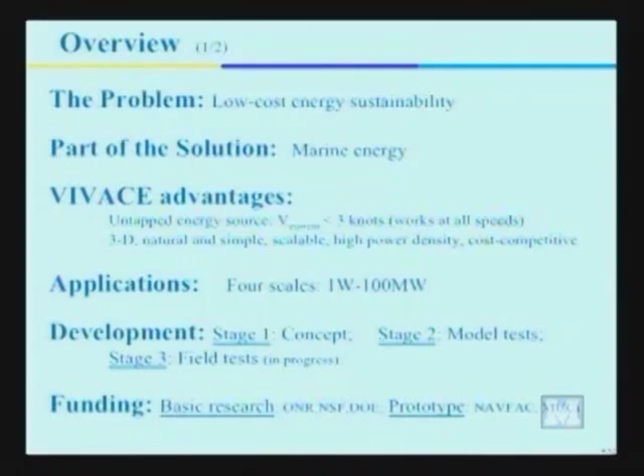The challenge we face when we harness hydrokinetic energy is that currents are typically slower than 3 knots, and rivers are typically slower than 2 knots. But turbines need an average of 5 to 7 knots to be financially viable. Of course, there are exceptions, like the British Channel current, which goes up to 15 knots.

Southwest of Korea, the current is up to 12 knots. The East River in New York, which is not actually a river, has speeds going up to 8 knots. And there are a total of 7 sites in the United States where velocities are in the range of 5 to 7 knots and higher.

So with this technology, I believe we are opening up accessibility to a vast amount of energy which right now is not accessible. And there are lots of applications of this technology that we will talk about.

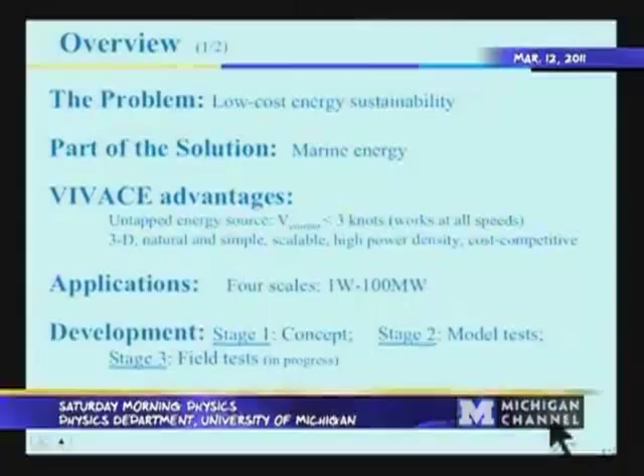Funding for basic research in my lab comes from the Office of Naval Research, the National Science Foundation, the Department of Energy, and for prototype development, it comes from the Naval Facility in Port Hueneme, California, and the Michigan University Commercialization Initiative, and other sources. This is where we are today.

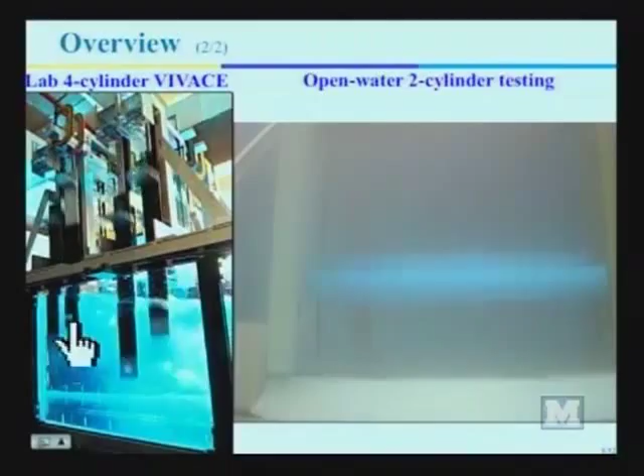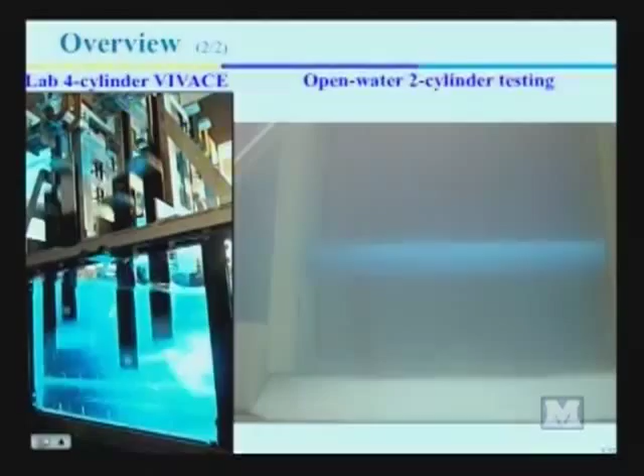Each one of these cylinders, or VIVACE converter, is a very simple machine, just a cylinder transverse to a flow, and the steady flow drives the cylinders transversely. So it behaves like a 4-cylinder reciprocating engine where the fluid flow is the fuel, but at the same time it's the camshaft and all the mechanical connectors. There's no mechanical connector there. Everything is hydrodynamically connected.

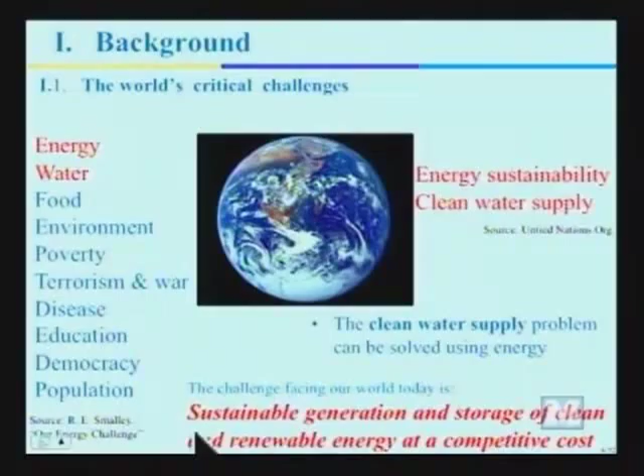Let me start by giving a quick background. There have been many studies of the challenges that the world faces, and energy always tops the list. Water comes second. But if we can actually solve the first problem, then we can do something about the second one. The issue is that we need a lot of energy in order to desalinate water. So I would say the top challenge we face is sustainable generation and storage of clean and renewable energy at a competitive cost.

How much renewable energy do we have? To put into perspective, this is how much we typically consume in a year, about less than half a zettajoule. Joule is a very small number, but zetta is 10 to the 21. Biomass captures about 4 to 5 times as much, winds can supply about 12 times as much, and oceans absorb about 600 times as much energy. So marine energy is about 97% of the energy we get from the sun, after reflection and radiation from the atmosphere and the surface of the Earth.

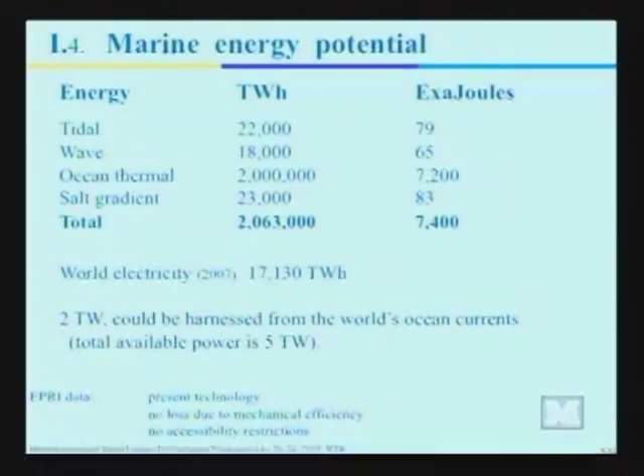But where is that energy? Unfortunately, most of it is in ocean thermal energy, and there are devices that can harness ocean thermal energy, but they are big and expensive and not particularly scalable. On the other hand, we have plenty of energy in waves, tidal, and salinity gradient. Compare this to world electricity consumption, which is about 17,000 terawatt hours. The Electric Power Research Institute in California has done several studies, and these numbers represent what we can harness with present technology. Hopefully, with new technology coming up every year, we will be able to access more of that energy.

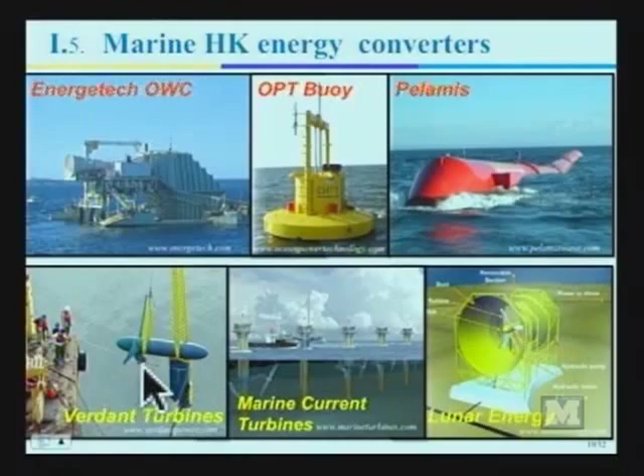And these are underwater devices. They're all turbines, as you can see. This is the Verdant turbines, I'm sure you've heard of those, about 5 meters in diameter. This is American, this is British. Each one of those monopoles has 2 propellers, each one is 12 meters in diameter. They're pretty big, so we're talking about 40 feet in diameter propellers.

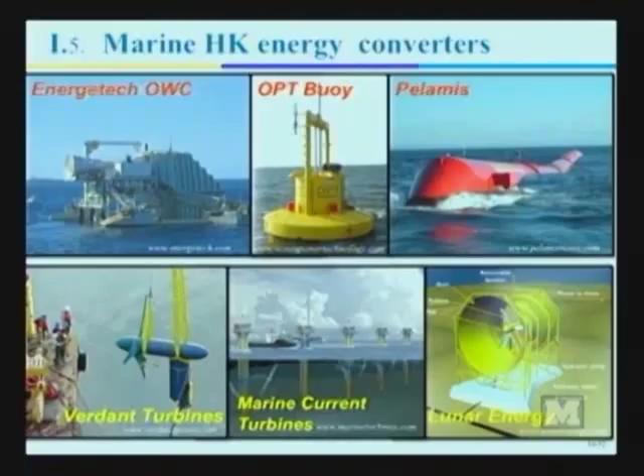This has not been built yet. It's 20 meters in diameter, 20.5 meters long, and typically they're designed for velocities of 5 knots and higher. If you use a turbine like this one, the lunar energy turbine, in the ocean, you need to leave behind it a space of about 235 meters because they create a wake with a lot of turbulence. That's what brings the power density down, which we're going to talk about in a few minutes.

Power density is the Achilles heel of all renewable energy technology. In other words, you need a lot of space, a lot of volume, in order to be able to harness a relatively small amount of energy. That's where, of course, fossil fuels are much more advanced than we are. Let's talk a little bit about flow-induced motions.

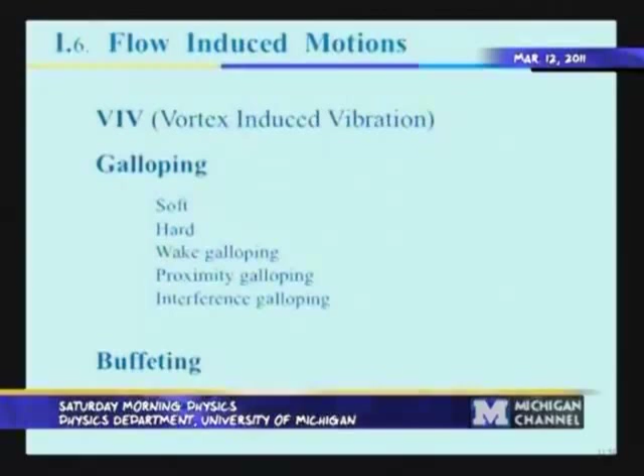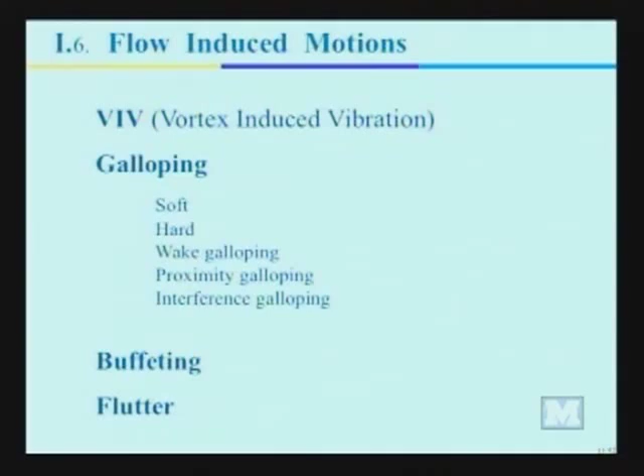If you have a body in a fluid, the body, if it's rigid, usually you just measure the forces in engineering and we can easily design for it. But if it's flexible, either because it's like a car antenna, a building, a pipeline, a cable, anything which is flexible, it gets into vibrations. And that's the difficult part.

Now, the presence of the body, of course, changes the fluid. The fluid generates vorticity that drives the body. So there's a fluid structure interaction phenomenon. There's a coupling between the fluid motion and the body motion. And that generates some instabilities. One of those is vortex-induced vibrations that we'll talk more about.

There's an even more vigorous motion, which is called galloping, and there are several forms of galloping. And then there's an even more vigorous motion, buffeting, and bluff bodies, that is not slender bodies, bluff fat bodies, get into VIV, galloping, and buffeting. There's another form of instability, like flutter instability. This is what airplane wings do.

So in this technology, we started with VIV, but we're using both VIV and galloping now. I don't think that we can use buffeting because buffeting is affected by ambient vorticity, which is a random event, and you don't want to design a machine based on randomness.

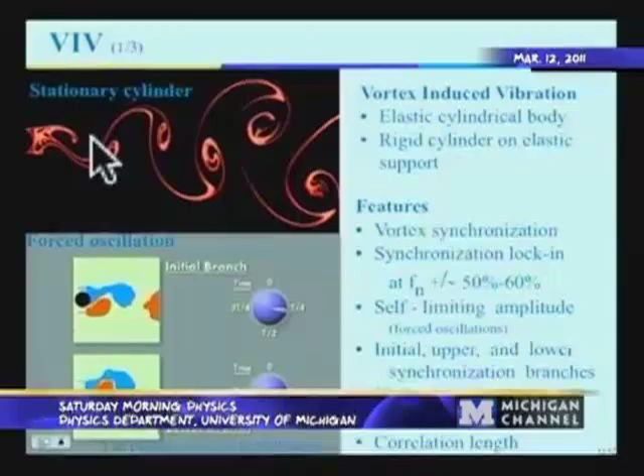So let's look at VIV first. What I have in this little picture from a lab, this is about a foot by a foot. This is a cylinder in a steady flow. And even though you have a circular cylinder, even though you have a symmetric body in a symmetric flow, the wake is not symmetric. So what happens, vortices get generated.

And the only stable pattern in nature actually is that of perfectly alternating vortices. So that introduces a periodicity into the flow. So when you have a periodic excitation, then if the system has a natural frequency, it will respond to that. And then you get into resonance, which means a lot of energy going from the excitation to the body, which, of course, is what we're trying to avoid in engineering.

I'll come back to the previous picture. I want to show you a more realistic picture at higher velocities and higher diameters. Let me make a parenthesis here. Most of you probably know Reynolds number, but what it is, think about it as velocity times diameter. So the bigger the cylinder, the bigger the Reynolds number, the bigger the velocity, the bigger the Reynolds number.

And you can see how this is a cylinder. We have a boundary layer. That's a very thin layer of fluid in contact with the body. That's where all the vorticity gets generated. And when you have a bluff body like this, vorticity goes through this interface between the laminar flow, the external flow, and the turbulent flow here, and rolls up.

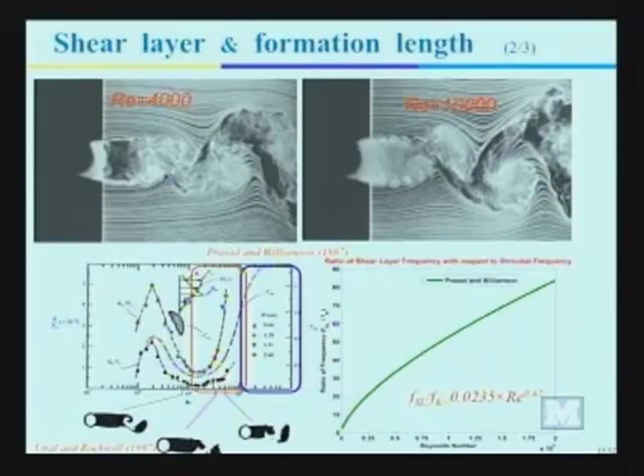If you have an airfoil, all this vorticity just goes into a narrow wake and goes away. But if you have a bluff body, for reasons that are not quite well known, it rolls up, and it forms large vortices. So in this pretty turbulent flow, there is structure. And that structure is very periodic.

Now we talked about the resonance and what happens. So I want to explain now the difference between VIV and a regular resonance phenomenon. This is like a little oscillator. It has its own natural frequency. I just pushed it out of the way, and this is the preferred natural frequency. Eventually, the motion will die out unless I keep moving it.

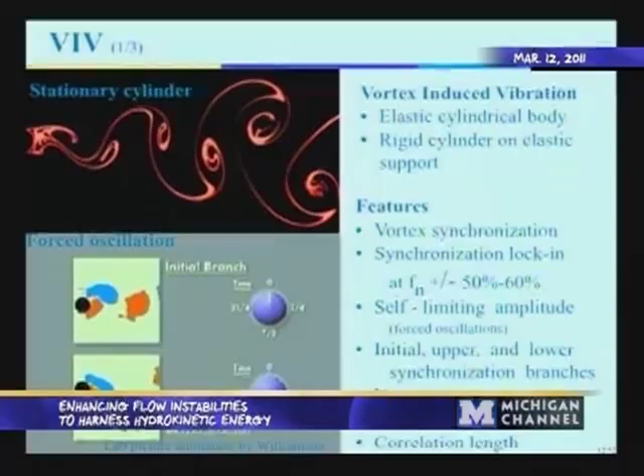Now, if there is an excitation that synchronizes with the motion of the body, with the preferred frequency of the body, then a lot of energy from the excitation goes into the body, and the amplitude keeps increasing. That's resonance. That's what we try to avoid in engineering.

When you have a flexible structure, you want to make sure the natural frequencies of the system are not anywhere near excitation frequencies. So, for example, if you take this one, which has its own preferred natural frequency, but you excite it with very high frequency motion, it doesn't go anywhere. And if you excite it with very slow amplitude, it just follows the excitation.

That's a linear oscillator. The good thing about a linear oscillator, from the engineering point of view, is that it has a very narrow bandwidth. In other words, once you get a little farther away from the natural frequency, the response is low. Vortex-induced vibrations is exactly the opposite.

There is the so-called lock-in phenomenon. The motion of the body grabs the vortex excitation. So what happens is the vortices, instead of shedding at their own frequency like they would with a stationary cylinder, they lock onto the motion of the body, and they shed when the body moves.

So what you have here in the pictures, in the two animations, is the cylinder goes to one end and sheds a vortex. It goes to the other end and sheds a vortex. That's like synchronization. You synchronize the excitation that you get from the vortices with the motion of the body. So that's like linear resonance.

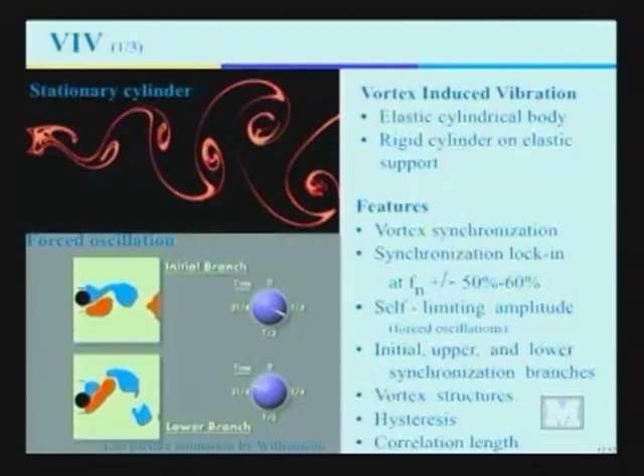The big difference is that this lock-on phenomenon occurs over a very broad range of synchronization. This grabbing of the excitation happens over a very long range of excitation.

Let me try to explain this. If my hand was not that strong compared to this oscillator, then the oscillator, if it could think, would grab my arm and push it at the frequency it wants, regardless of what the external velocity is. So in practical terms, if we design something like this to operate at 3 knots, it will work equally well between 2 knots and 4 knots. So imagine what a catastrophe this is in engineering, where instead of trying to design to stay away from one frequency, you're talking about a very broad range.

In practice, this is about natural frequency plus or minus 50 to 60%. So that's why I mentioned 2 to 4 knots.

So let me show you this graph and explain what I said a little bit better. I have here 4 oscillators. The first one is a linear oscillator. As I said, it has a very high peak at the natural frequency, and once you get a little bit far away from the natural frequency, the amplitude drops significantly.

Then this is a vortex-induced oscillator, but at low Reynolds numbers. When we first started this work, we looked at thousands of publications on VIV, and there was very little information on bigger bodies and high damping. We need damping in order to harness the energy. Without damping, you can't harness energy. You can't walk on ice - you need some friction to be able to walk. That's exactly the same concept.

So the oscillators at low speeds and small bodies exhibit an upper branch, then a lower branch, and then desynchronization. In terms of this dimensionless velocity, this runs between about 5 and 10. So you double the velocity and you still have a system in synchronization - consider that a resonance. When we started our experiments, there was nothing in that domain of bigger bodies, bigger Reynolds numbers, velocities, and so on, and nothing in high damping. Everybody was trying to work with low damping to see how the response of the system is.

For example, wires that transfer electricity come in a group of 5 or 6. If the wind blows transversely, the ones in the back get into galloping because of phenomena caused by the leading wires. These will keep moving until there is collapse - we don't know experimentally where that ends.

But that starts at this parameter I talked about earlier, the non-dimensionalized velocity, or reduced velocity. Galloping starts at about 20, and VIV ends at about 10. With the turbulence stimulation we introduced, which again mimics fish scales, we brought galloping down to about 11 and VIV up to about 11. So now we have oscillators with back-to-back VIV and galloping. They're both flow-induced instabilities, so as soon as we start this high amplitude response, there is no end to it.

Here it appears that it ends, but this is just limitations of my lab. Here with more damping, you can see it keeps going. So these are the 4 types of oscillators that we have. The first one is linear, the other are nonlinear, and this is what we are doing with Vivace.

So that was a background introduction. Let me talk a little bit about the development of Vivace. This is very rewarding, actually, because I had lots of help from the Office of Technology Transfer to be able to start a company. I had absolutely no idea how to start a company and how to make it grow and then have other people do it. And the machine is so simple.

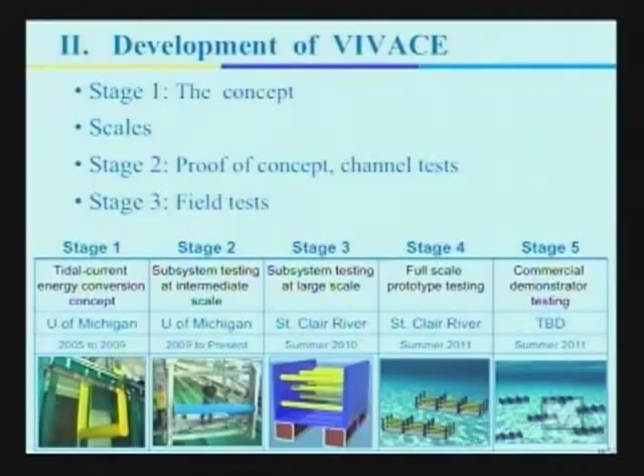And there are 5 stages of development. There's no way that actually you can take one concept and put it in the ocean and make it work. You have to go through several stages of development at increasing scales. Particularly in the ocean environment, computers cannot help us no matter how fast they are. It's going to be at least 20 more years before we have a numerical towing tank. The towing tank is around the corner in West Hall.

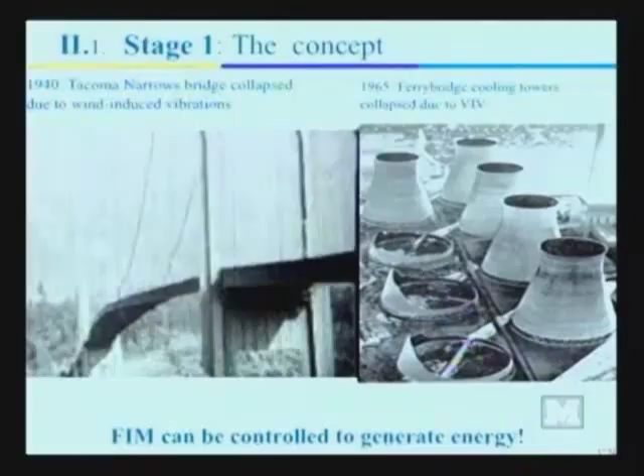And this is one form of flow-induced instability that I'm sure you have all seen. Back in 1940, when the Tacoma Narrows Bridge collapsed, von Karman said that this is vortex-induced vibrations. In the past 2 or 3 years, there has been some discussion whether this is flat plate instability, Hopf bifurcation, various other forms. But either way, VIV is a very important part of this.

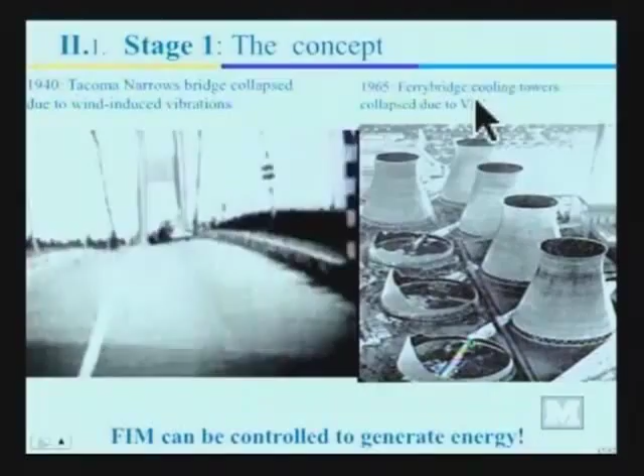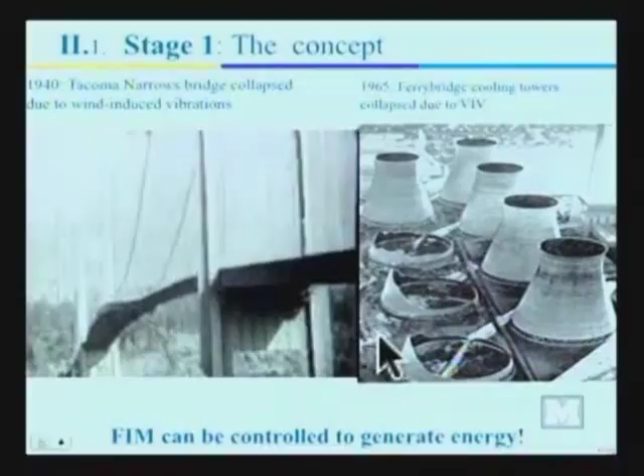And on the right, you have a maybe not so well-known disaster. In 1965, in Ferrybridge, England, these cooling towers were constructed, but they were designed as standalone towers. You can see how big they are - these are buildings down here. One day, the wind blew from right to left, and these 3 towers were found in the wake of the 4 towers, and in a matter of minutes, they collapsed. That's how much power there is in those flow-induced instabilities.

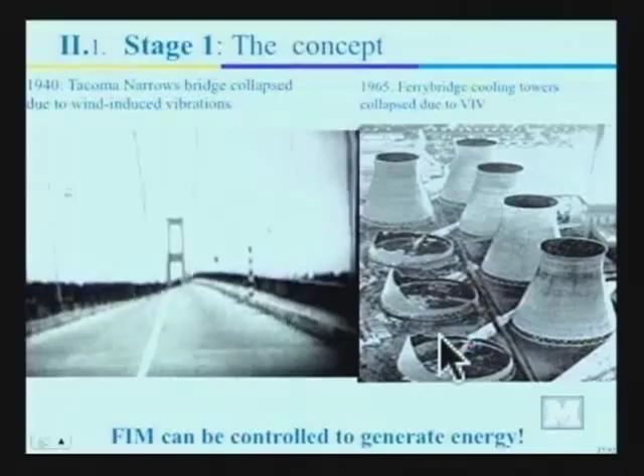We already talked about this cartoon down here. What I want to say is that the objective of what we're doing is to capture the abundant hydrokinetic energy in even low-speed ocean and river currents without using dams or turbines. The approach that we use, if it's vortex-induced vibrations, we enhance vortex shedding, we maximize VIV, and then we harness the energy instead of trying to mitigate it. And with galloping, in a similar way, we enhance a different form of instability that I will explain, and we harness the energy.

There are 3 important factors from fish biomimetics that have given us guidance. First of all is the surface roughness, the scales - they have a tremendous impact on what we're doing. The second one is the proximity of cylinders, as you will see when I show you again the video with multiple cylinders. If you can imagine a school of fish in an aquarium, you see that when they speed up, they tend to gravitate at certain distances between them.

First of all, if you take a fish model and you tow it in the towing tank to find the resistance, the drag is much higher than their muscle power. So how do they move? They curve their bodies, they collect a large vortex, they straighten their bodies, shed that vortex, collect one on the other side, and they keep gliding between the vortices. When you have a school of fish in an aquarium, you see how they wiggle - they basically glide between vortices generated by fish ahead of them. That's the way they can move fast really in water.

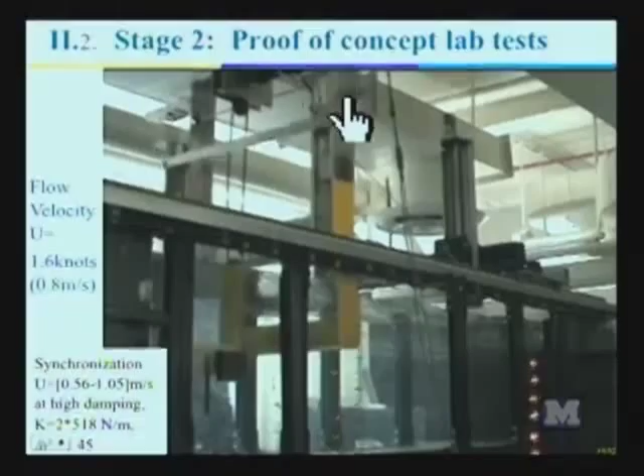And it's this flow that drives the cylinder transversely. Nothing else drives the cylinder. All it is is just this cylinder suspended by those springs, sliding on shafts. And then we have a very simple mechanism of transmitting the motion to a generator which lights the bulbs.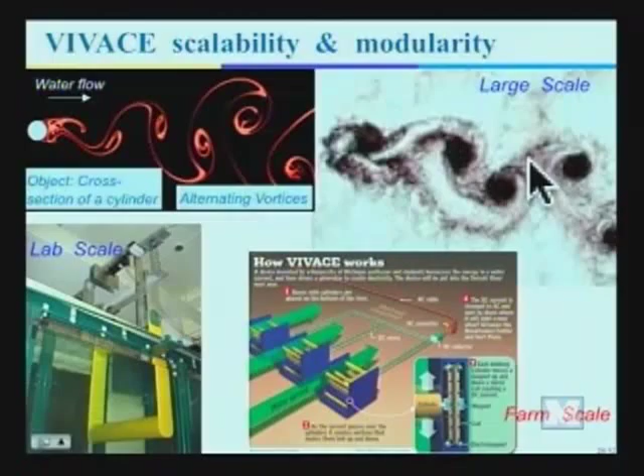So you have a periodicity. What happens, I'll try to make this simple. What happens is you have everywhere this street of vortices, which is called the von Karman vortex street, except for a transition here. Let me explain what this is. This is either for a sphere or for a cylinder. This is like the Reynolds number.

Think about it as proportional to velocity. And this is the drag coefficient. Golf balls operate right here. Why? You go through laminar flow. Nobody's strong enough to hit the golf ball to go any faster. So if you didn't have those dimples, it would get stuck into laminar flow.

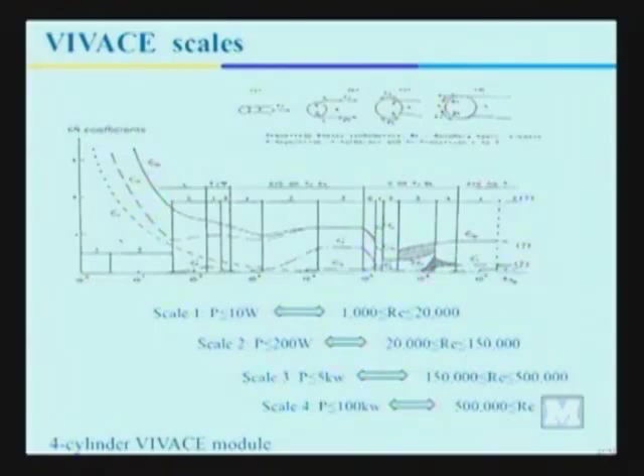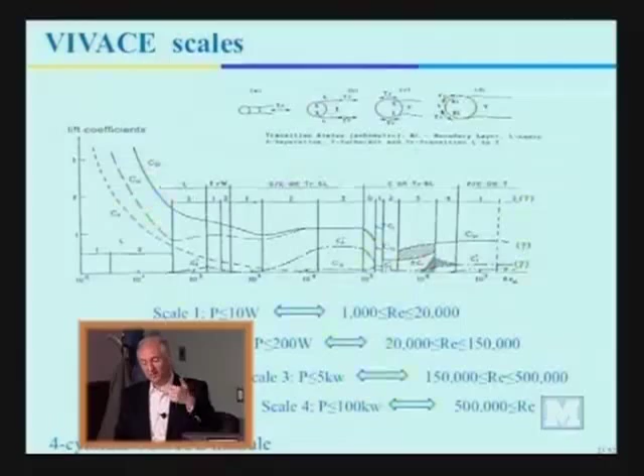You put those dimples in, and you grab the drag graph and move it to the left, to lower speeds, and then the cylinder, the golf ball in this case, drops into this area where the resistance is very low. That's where VIV, though, gets suppressed. So I have to do something different, and we have overcome that by using turbulence stimulation. The numbers that I have here are scales, and I'll talk about scales a little bit later.

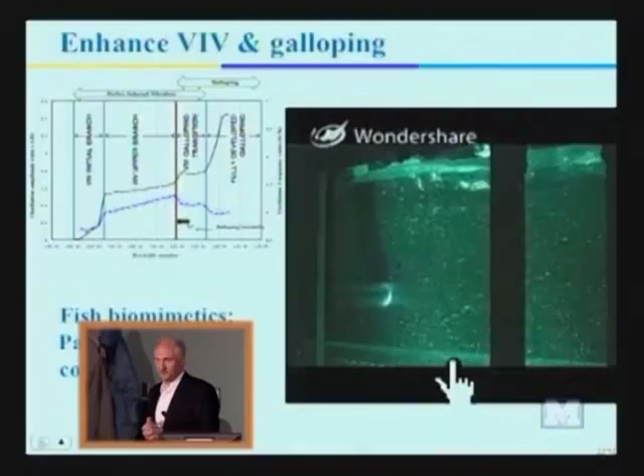Now, this is VIV in my lab. This cylinder has turbulence stimulation, has like fish scales on it in a specific location. And this is VIV, then there's transition, then there's galloping. I need to put some sound here.

I'm increasing the speed slowly because we're talking about 8,000 gallons of water. I don't want to break anything, which I have done a few times. So in a few seconds, you will see how it goes from VIV to galloping. Again, just the flow from left to right drives this, nothing else. What happens is basically hydrokinetic energy, horizontal hydrokinetic energy, gets converted to mechanical energy, which then we can convert to electrical.

That's galloping. And it hits the stops. We don't know where it would stop. It's just the limitations of my lab.

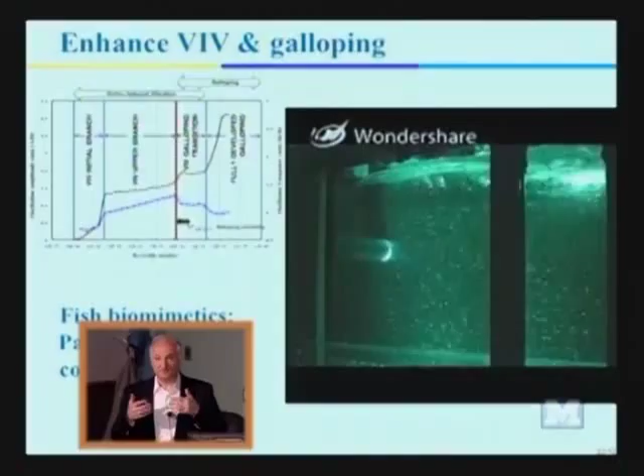We did this about 3 summers ago when I had no idea what I was doing. And of course, we broke through the stops and we cracked the plexiglass. Now we're doing a little bit better. We're smart enough.

The third stage is going to the river. And that's actually scale 3. You remember I had 4 scales. This is scale 3; the lab is scale 2. And these cylinders are pretty big. They're like 25 centimeters in diameter, that's 10 inches, and 2.7 meters long, that's 105, 106 inches. This is smooth, totally smooth cylinder.

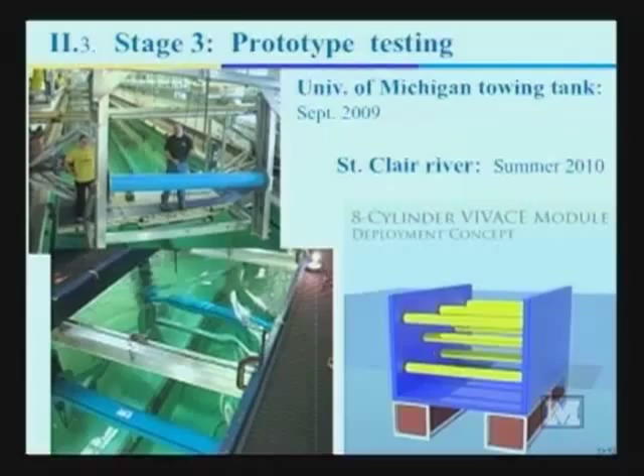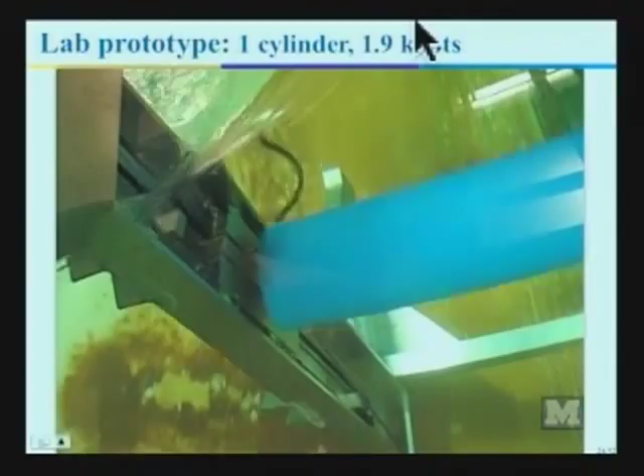And the speed is 1.9 knots. And you can see that it starts right away. And pretty soon it's going to hit the stops. And that's where we stop the test.

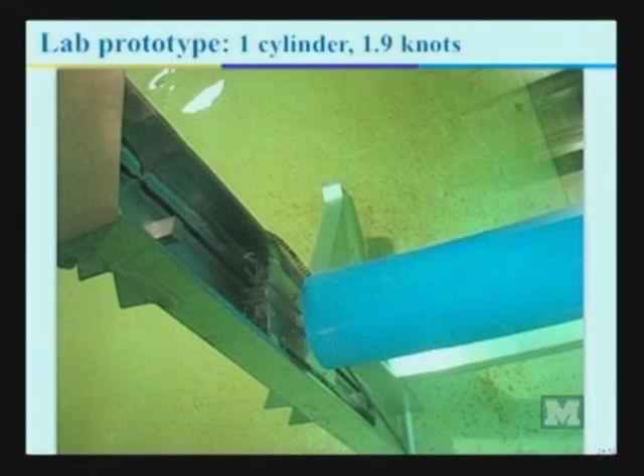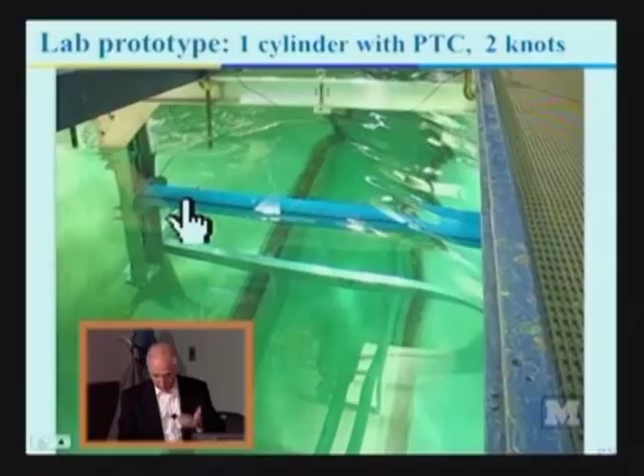Then, those stops were set at 1.5 diameters. In other words, the total stroke was 3 diameters. With the cylinder in my channel, the stops were set at 3 diameters, so the total stroke in galloping was 6 diameters. This is with turbulence stimulation, and I will talk about turbulence stimulation again later. This strip, and one on the other side, are the turbulence stimulation. They're thin, like fish scales. They're inside the boundary layer.

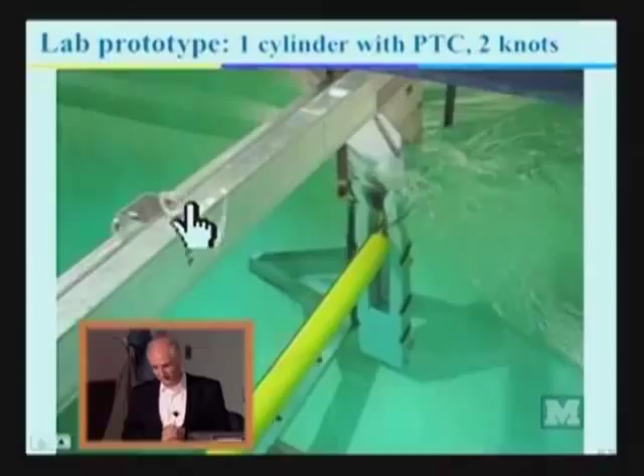And there it hits the stops, and of course we had to stop the testing. And we went to a smaller cylinder, like a 15 centimeter, 6-inch diameter cylinder, same length, because we want to see how far we can go. And you can see we're hitting the stops again. And this time the stops are at 3.25 diameters. Total stroke, 6.5 diameters. Amazing mechanical energy.

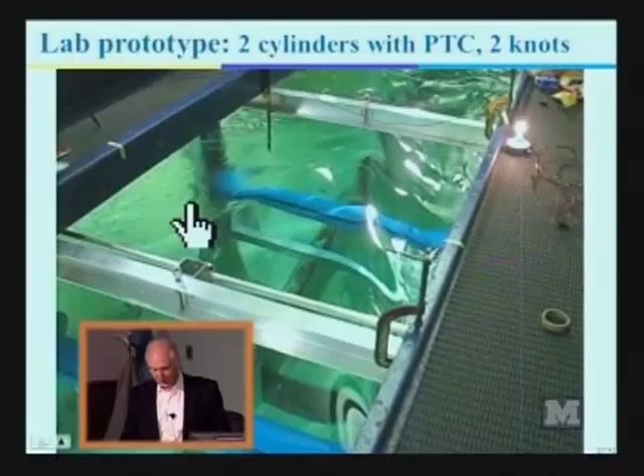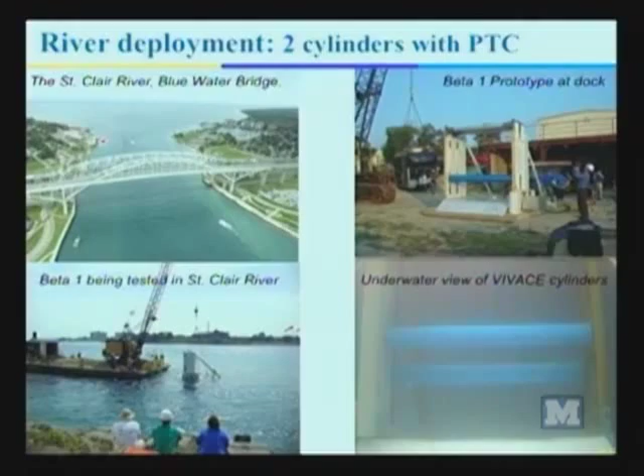Here it's 2 cylinders. And here's when we went to the river. This is the St. Clair River, the Blue Water Bridge. And then we had Dunn Paper company which supported us. They gave us access to the river through their dock, and we're very thankful for that. We got a barge, we deployed it. This is what you've seen before. Now probably you have a better understanding of what you were looking at.

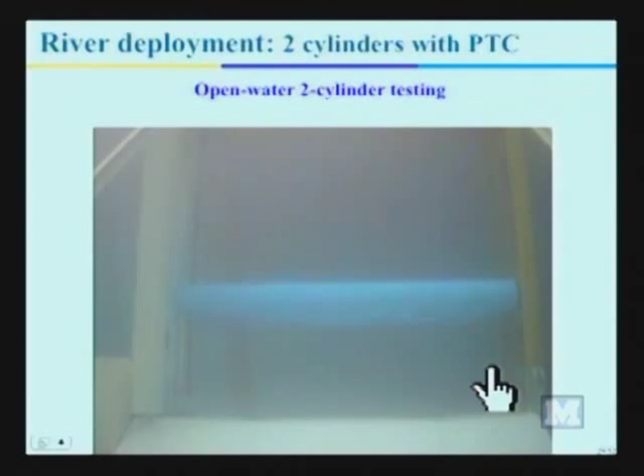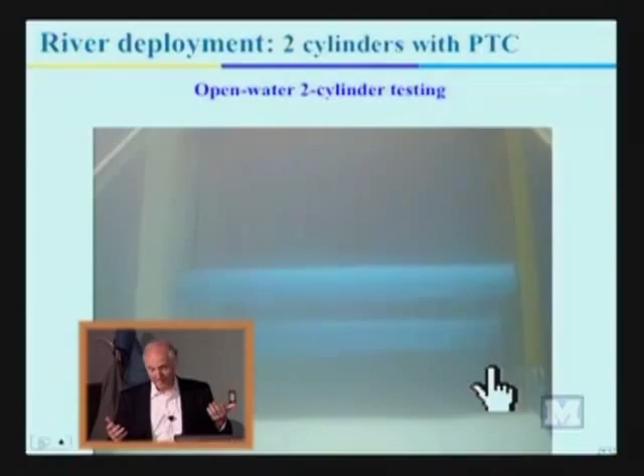The flow is coming again towards us. There is turbulence stimulation on the other side of the cylinder. You cannot see it. And the flow, which was quite interesting, is not uniform anymore. In my channel, of course, I generate very smooth flow and very, very uniform flow. Here there was a change in velocity from left to right of about 15%. Within those 2.7 meters, there was a 15% variation of the velocity, and it still kept going. It didn't stop until we broke a few things.

So let me talk a little bit about research and what we have achieved in order to get here, and what is the vision. I've shown you some marine hydrokinetic energy converters at the beginning. There was a point absorber, a line absorber, a surface absorber, and an area absorber. Our vision is to have a 3-dimensional absorber to be able to distribute cylinders in the ocean environment like fish go in a school.

And what I will talk about in a few minutes is that the cylinders really interact between themselves. I haven't pointed it out when we looked at the 4 cylinders oscillating, but you've probably noticed that the last cylinder is moving with the same amplitude as the first one. You would expect, as we're taking energy out of the flow, the last one has less hydrokinetic energy to harness, and therefore will have a less vigorous motion. Nevertheless, they all move synergetically, just like fish do in schools.

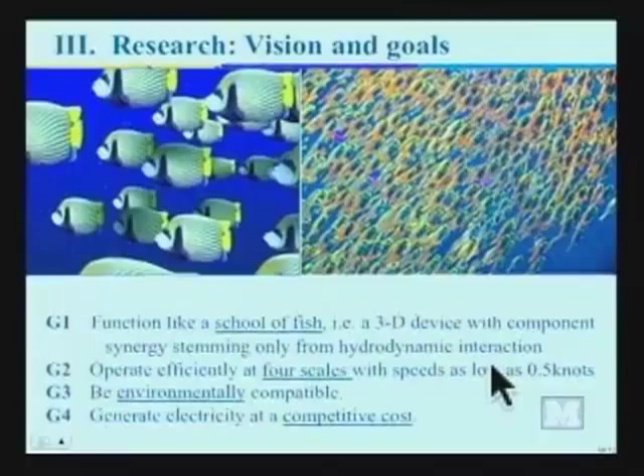And if you remove one, the first one gets affected. So there's lots of secrets in that we don't know yet. I mean, fish are far too smart for us when it comes to moving in the ocean environment. Well, we operate in 4 scales because there are many different applications. We definitely want to have an environmentally compatible technology. I don't think that in the next 3-4 decades anything will survive unless it's environmentally compatible. But of course, the driving force is cost. We have to make sure that we generate electricity at a competitive cost.

Let me talk a little bit about some technical stuff, but I think that I'll be able to simplify it so that you understand what I'm talking about. And those of you that have background in physics will appreciate this as well. This is like a schematic of the channel we have, and we have those oscillators. What I have shown you in pictures is this kind of oscillator. You have just a cylinder in a steady flow, supported by these struts and suspended by these springs. And the flow comes in this way and pushes it transversely.

Even though these are very benign oscillations, only about a cycle a second, and therefore good for the environment, there are 32 million seconds in a year. No springs are going to last that long. So we need to do something else. And what we did is we introduced controllers. So you have a motor here, and a controller which returns a feedback signal, simulating a spring and a damper. So instead of having the springs and the dampers that harness the energy, we put this in a controller in a computer.

Now, calibrating for the spring is very simple. You just take the motor, you hang a weight, and you find exactly how much the motor turns. Very simple process. It takes less than a day. Calibrating for damping is very difficult. Damping is nothing like what we teach to our students, that it's linear, viscous. After we did the system identification over a period of about 1.5 years, we found that there were 4 terms that were nonlinear, static, and then another 4 that were dynamic with memory. Very complex viscous damping.

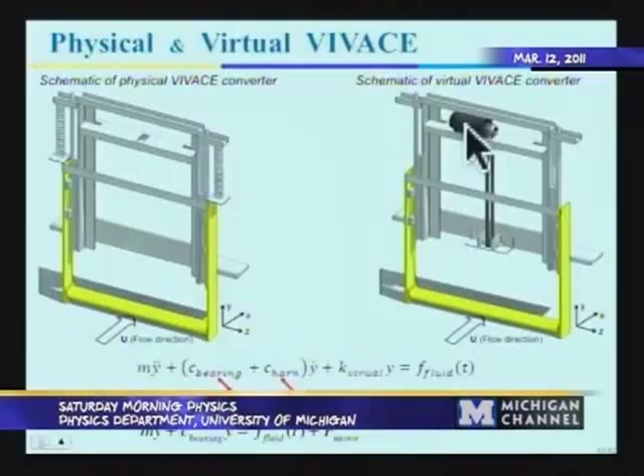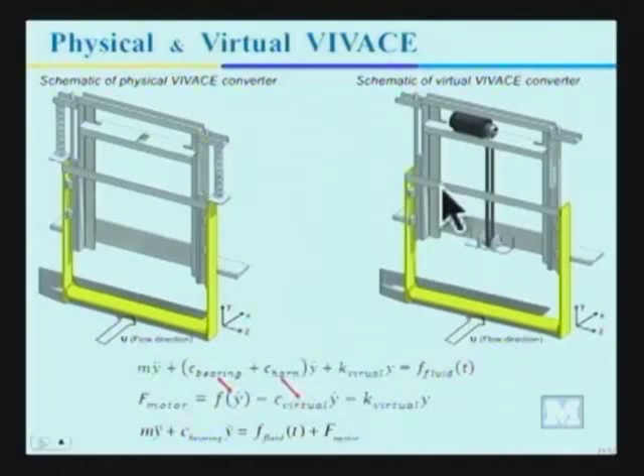But the next step was to integrate it with a power takeoff system. So this generator, this motor here, also works as a generator. Whenever the system needs a drive, we drive. Whenever it has excess energy, it produces energy. And of course, springs, whether they are physical or electrical springs, are conservative, so whatever energy comes in goes out. Okay? So that was an important development.

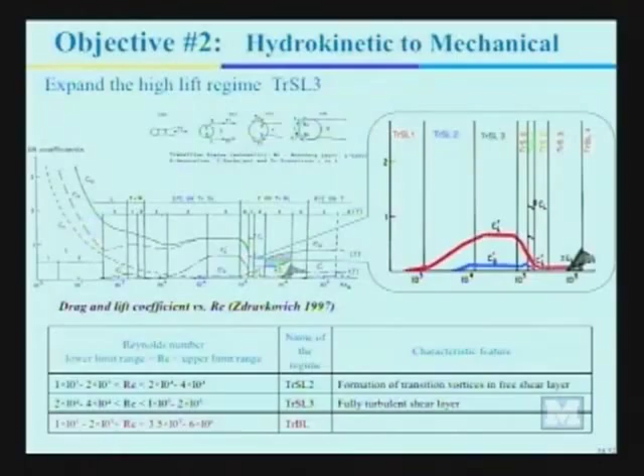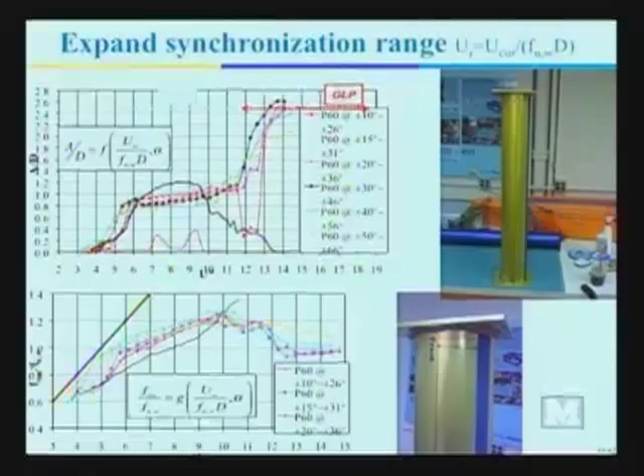Now, the other one, of course, was convert hydrokinetic energy to mechanical. Okay? So increase that. And this is the turbulence stimulation I'm going to talk about. This is just sandpaper. We use this technology a lot in naval architecture and marine engineering when we do model testing with small models. We have to trigger the flow to become turbulent in order to match conditions that we have in the ocean. So I used practically the opposite concept in order to get the cylinders excited more.

And this gives you an idea of what the turbulence stimulation does. The first cylinder, remember the smooth blue cylinders that I've shown you at the beginning? Well, I mentioned that when we go from laminar to turbulent flow, it shuts down VIV, and that's exactly what happens here, this transition from laminar to turbulent. Then we put turbulence stimulation, just sandpaper in the right place, and we hit the stops. We went through laminar flow and through transition into turbulent flow without ever losing VIV.

Then we went back 3 months later. We changed as much as we could the prototype. The stops were placed at 1.9 diameters, and again, we kept hitting the stops. Then we went to the little yellow cylinder that I mentioned, and we started hitting the stops at 3.25. So we don't know how far this goes.

But the interesting thing here is that I have VIV back-to-back with galloping with no gap between the two. So we start these flow-induced motions here, and we don't know where they end. What that means in practice is that I can design something that's going to start harnessing energy at 1 knot, and I don't have to change anything for that to keep absorbing energy.

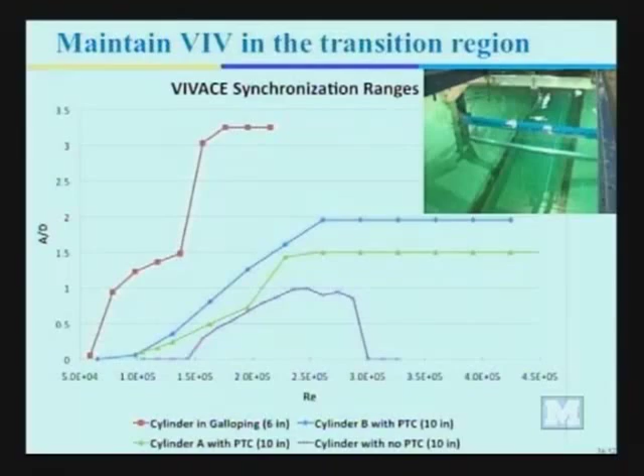All right, this is a little bit more about passive turbulence control. And actually, the PhD student who did this, is a postdoc in my lab, is right here, Jim. This is the paper in the sandpaper. This is the roughness of the sandpaper. And this is magnified, of course, a double-sided tape. Now, this roughness generates little vorticity that coalesces with the large vortices.

But galloping is a little bit of a different phenomenon. I can't get really into the details of that, but it is caused by the asymmetry as much as the roughness. So if you have a smooth circular cylinder in a steady flow, it will not go into galloping. It has to be non-symmetric. For example, if you have a square cross-section, it's symmetric, but as it starts moving, the flow changes direction and doesn't see a symmetric body any more. That causes transverse instability, and that's galloping.

Now, look at the interesting fact here. We were trying to find out what really causes what. Is it the roughness that causes the large amplitude motions, or is it just the asymmetry that we introduced by putting the sandpaper? So at some point, we removed the sandpaper completely, and we left just the double-sided tape. That's 192 microns. You know how thin tape is. That's less than 1/5 of a millimeter. And we got amplitudes of 3 diameters, strokes of 6. That's about the size of the fish scale.

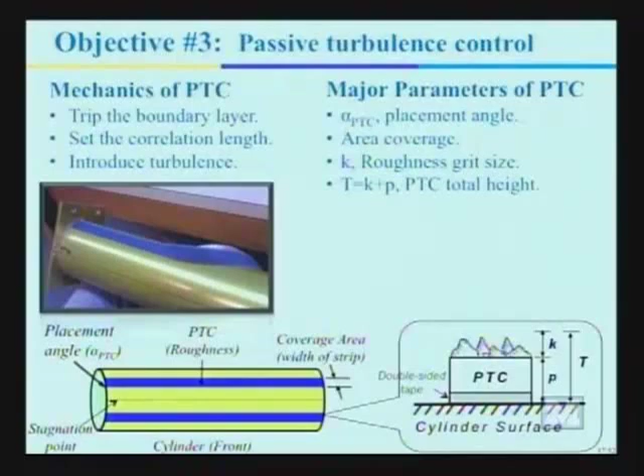Now, let me try to explain this because I have one point to make. Where did we place that turbulence stimulation? That's sandpaper, think of it half-inch wide, and what this angle here indicates is the beginning of the tape, okay? The beginning where we place the tape. And we deciphered this map, which I think is a great publication. We're waiting for it to come out.

And over here, if you place the paper at the beginning, you have weak suppression. Here we have various forms of galloping, and here strong suppression. So in the process of trying to enhance vortex-induced vibrations, we learned more about suppression than we have learned in the past 60, 70 years.

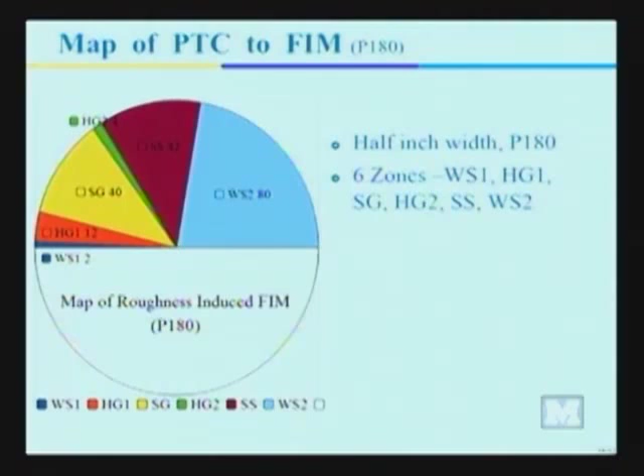Now, this is 180, P180. Those of you that know, it's a very smooth sandpaper. This is a rougher one, P60, and I'll go between the two. Look how close they are. So you can see how broad is the range where I can put the sandpaper, just the beginning of the sandpaper. It's 48 degrees wide, and I can get galloping and enhance the motion.

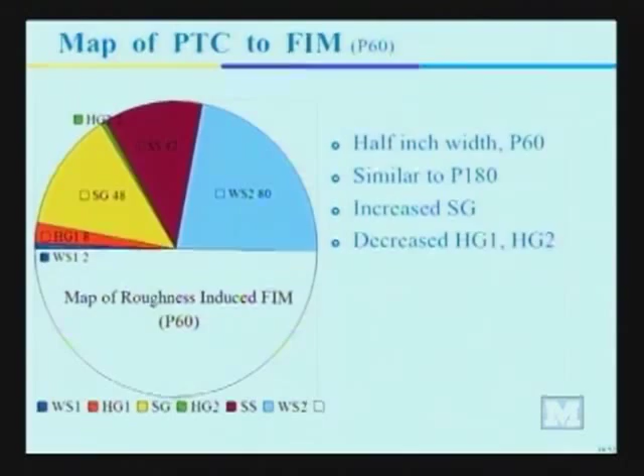So this is a very robust parameter. I can play with it, the flow can change direction, and I still have a lot of enhancement. So that's how fish probably use it. Now, then there's the other issue, whether to enhance vorticial instability. We talked briefly about it. And this is for improving cylinder interaction.

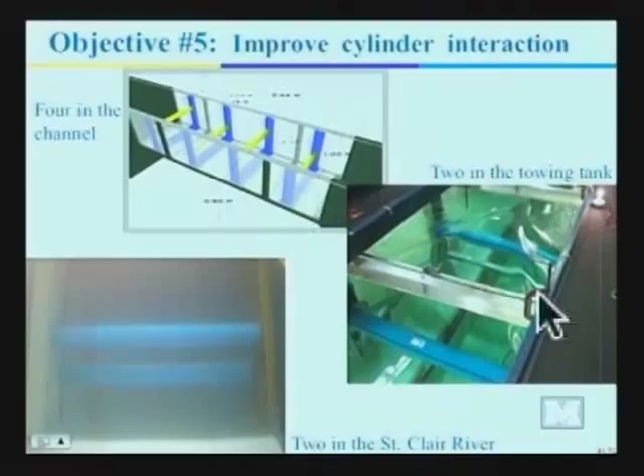In the channel, I have 4 cylinders. In the towing tank and in the river, we have 2 cylinders. And this is the video that you've seen before. Again, the flow goes from left to right. This is at 1.3 knots, 1.3 meters per second. One of the reasons I'm using that number is because wind farms typically are rated for 12 meters per second. The equivalent in water is 1.3 meters per second. So we're trying to make comparisons between wind farms and Vivace.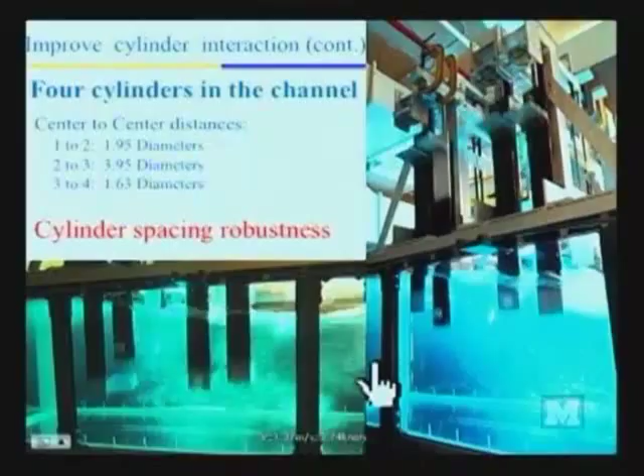And we started really this Christmas of 2009. We put them together. And actually, it was one of my Korean students. I told him, you're not going on vacation unless I have the 2 cylinders in there. I want to see what happens, because I knew something like that would happen. So we started working with the 2 cylinders. He did an excellent job and had it really working overnight.

And the distance between cylinders is important. These numbers here that I have between first and second cylinders, second and third and fourth, are almost random numbers. And we tested center-to-center distances of 1.5 diameters all the way to 6 diameters. That is a gap of half a diameter all the way to 5 diameters. And we cannot stop that. So cylinder spacing is very robust.

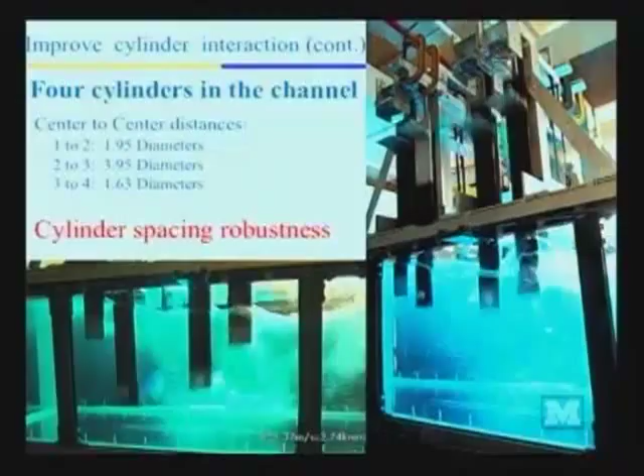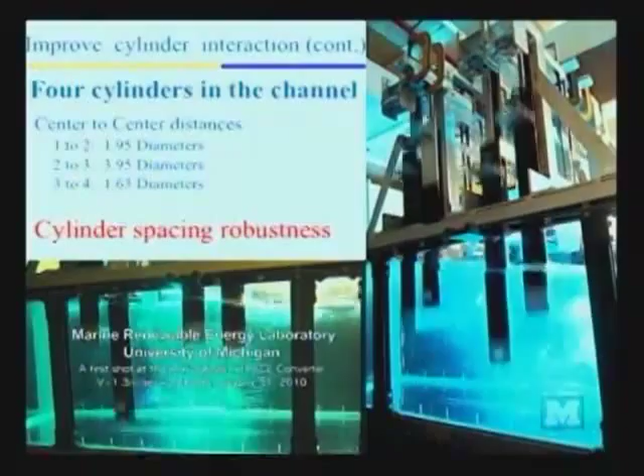And so in the development of the Vivace converter, we use mostly turbulence stimulation, which mimics fish scales, and cylinder spacing, which mimics the spacing that fish achieve when they move fast in schools. Okay. This is how fast it goes. Oh, this is an interesting one.

Quite often, people ask me the question, what's the efficiency of the system? And of course, I can give you some efficiency numbers. But in renewable energy devices, a propeller, a Vivace, a buoy, a solar panel, they all have very different ways of calculating efficiency. And we need a common denominator to be able to communicate.

And again, the Achilles heel of renewable technology is power density. That is, if we give you some space, put whatever devices you want in there, how much energy do you give us? So in the numerator, you have the power that you harness. In the denominator, you have the volume that you occupy. If you look at fossil fuels, like a diesel engine, we're talking about 25,000 watts per cubic meter. If you look at my first Vivace, we're talking about 51. That was the yellow one at the beginning.

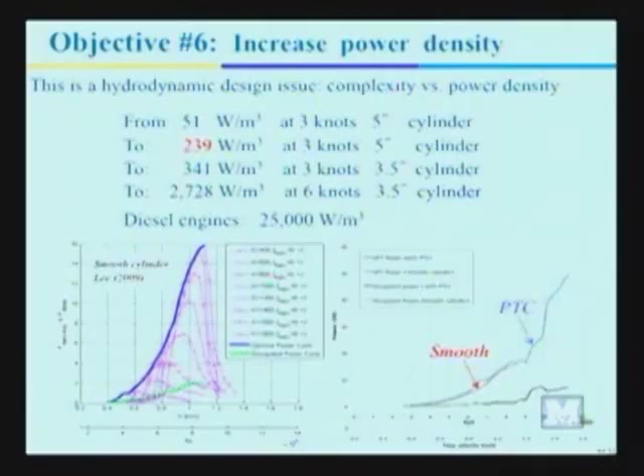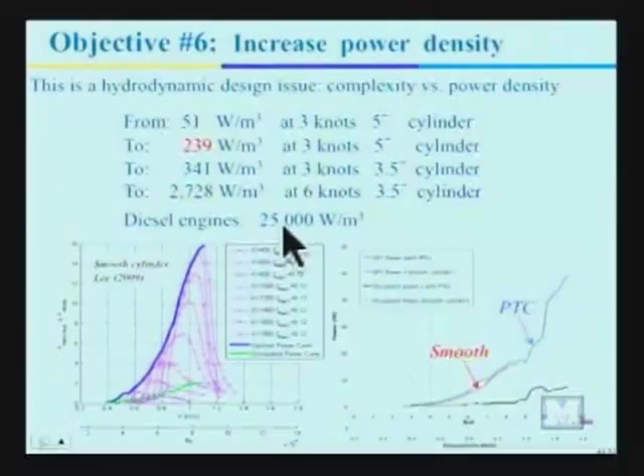Then we went up. This number actually is before we introduced multiple cylinders. And we assumed large spacing between cylinders. And we got this number. You understand that once we do more testing to get the numbers for multiple cylinders, we're going to have much higher power density. If you scale that to 6 knots, which is still a realistic number, you are within an order of magnitude from diesel engines. So very promising for marine renewable energy technologies. This puts things a little bit into perspective.

We made some comparison with wind farms. The 2 biggest wind farms in the world are in the state of Texas. And we compared equivalent, that is 12 meters per second for a wind farm and 1.3 meters per second for water. And the ratio is about 15,000. That's how much energy we have in water. And the good thing about water is it's the best natural medium for storage. You know that batteries cannot really provide a lot of storage, but the ocean can, water can, and it's everywhere.

And these are 3 wave energy devices: Pelamis, Power Buoy, and Energetech, the 3 that I've shown you before. And these are turbine types.

Of course, the advantage that Vivace has is that you can distribute Vivace cylinders in 3 dimensions, so you make maximum use of the space. The other advantage is that if you create a lot of turbulence, you can break it down into smaller components so the gradient of turbulence change in the flow goes down, which is important from the environmental point of view.

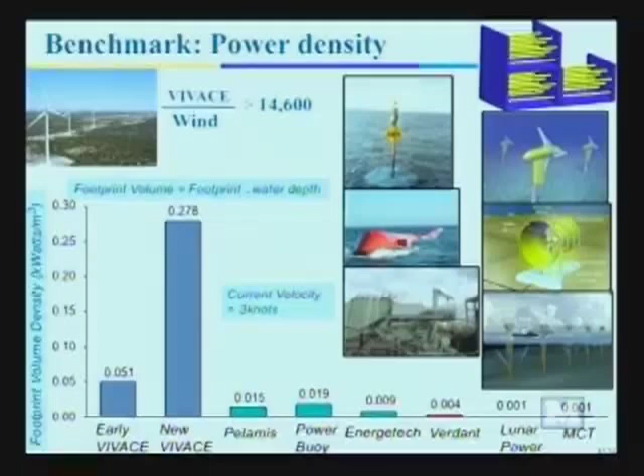In terms of cost, this is probably a complex one. It's the levelized cost, and people in the company did it. I'm not very well educated in economics, or I would say not at all, other than balancing a checkbook. But the cost in cents per kilowatt hour is about 9 to 12, so it's very competitive.

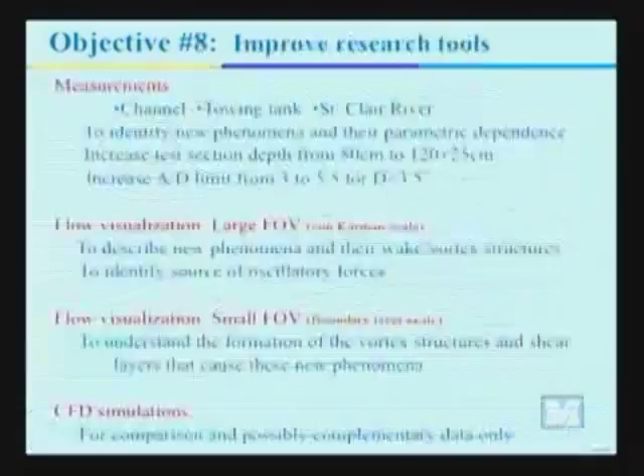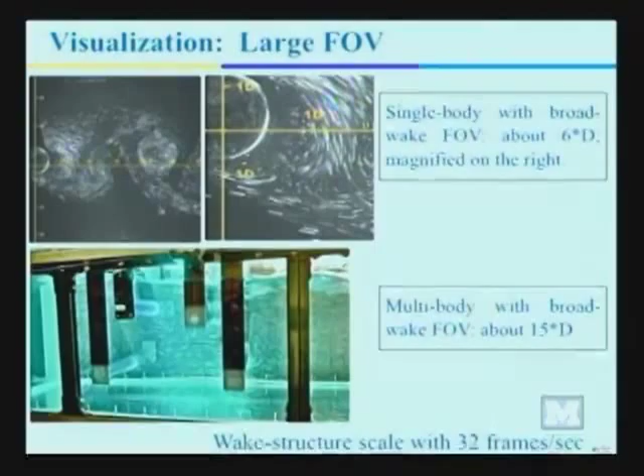And the next thing is how to improve our lab. Actually, in December, I took the lab down, and we're rebuilding it now - slow process, having to get through some red tape. And we're going to improve visualization.

I want to show you, before closing, some computational fluid dynamics. The cylinder, as simple as it looks, is the most complex shape for doing computational fluid dynamics because of vorticity, because of oscillation of the separation point, and so on. If you use the entire, literally, computer power of the Department of Defense, you can run about a couple of cycles of flow past a stationary circular cylinder, solving the governing equations. But it takes thousands and thousands of processors. It has been done 3-4 years ago.

And if you use more reasonable methods that all of us have access to, you can get relatively good numbers, up to Reynolds number of about 1,000. You can push it a little bit more. When you go to...

VIV, just because of the motion of the body, it triggers those heuristic tricks that they put in computational fluid dynamics algorithms and software to trigger the flow. And you can make it work pretty well in VIV up to Reynolds number of about 10,000. Of course, we work in hundreds of thousands and millions of Reynolds numbers.

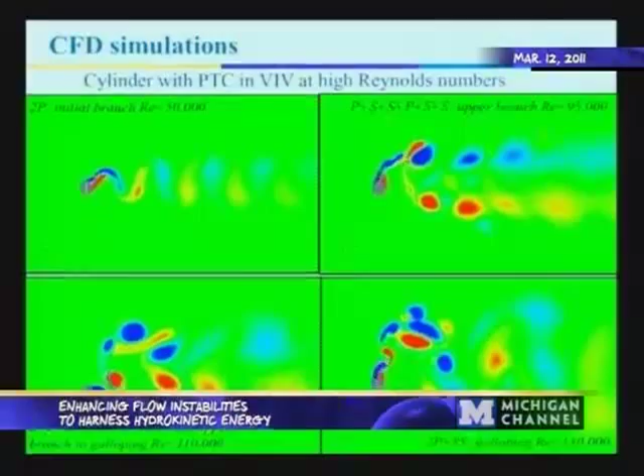So what we did - and I would never consider that something we can actually use, this is a lucky break only, nothing to brag about - when we introduced the turbulence stimulation in the numerical modeling, we got this, which is amazingly close to what we're getting experimentally.

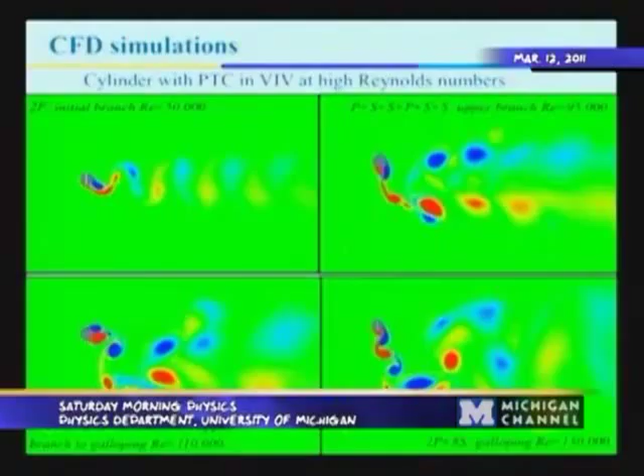So now we can study, just for this range - I don't know how far this is going to work - phenomena that we cannot study easily in the hydro lab, like what happens in the boundary layer, how boundary layer in one cylinder interferes with the wake of the other cylinder, how flow transitions from VIV to galloping, and lots of other phenomena. But again, it's not 100% scientific.

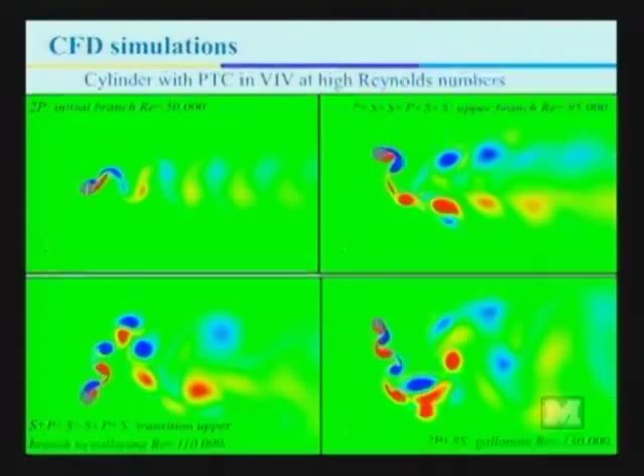Thank you very much for your attention.